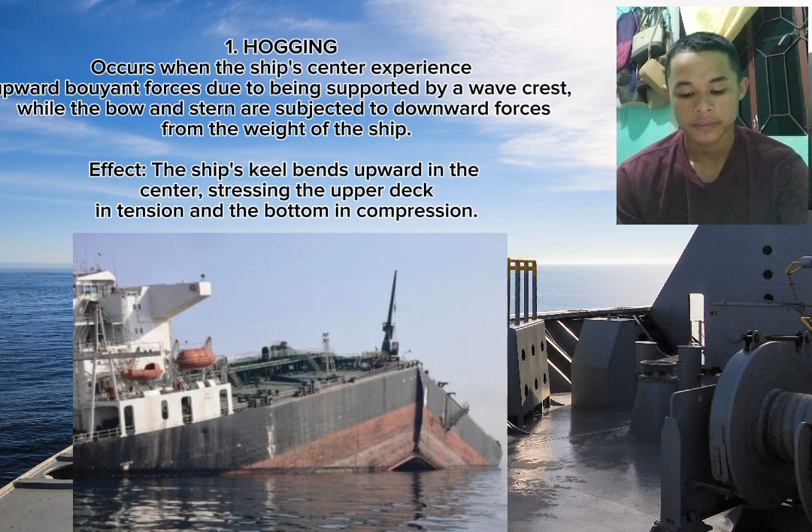Hogging. Hogging occurs when the ship's center experiences upward buoyant force due to being supported by a wave crest, while the bow and stern are subjected to downward force from the weight of the ship. Effect: the ship's keel bends upward in the center, stressing the upper deck in tension and the bottom in compression.

Hogging is a type of longitudinal stress that occurs in a ship. The middle section of the hull is lifted higher than the bow and stern. This happens when the ship is supported by a wave at the center while the ends are in troughs, or when the midsection carries a heavier load than the extremities.

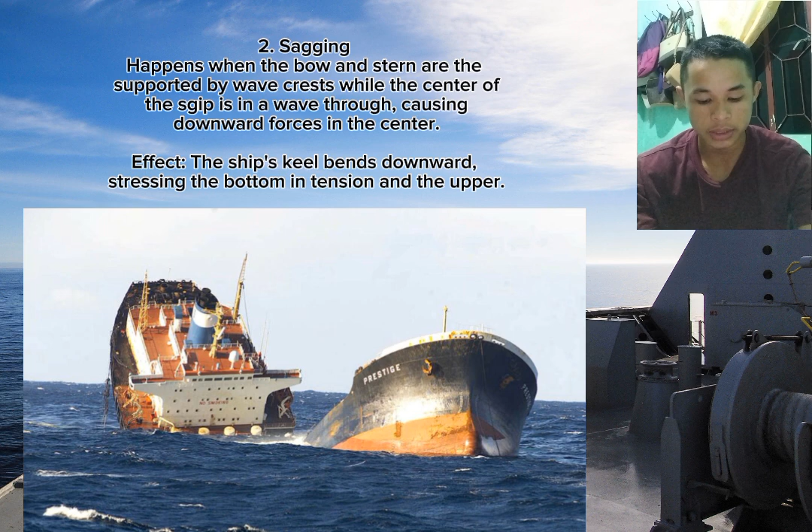Sagging. Sagging happens when the bow and stern are supported by the wave crests while the center of the ship is in a wave trough, causing downward forces in the center. Effect: the ship's keel bends downward, stressing the bottom in tension and the upper deck in compression.

Sagging is a type of longitudinal stress in ships that occurs when the bow and stern are lifted while the midsection is lower. This typically happens when the ship is supported by the waves at the ends while the middle section is in a trough, or when cargo is heavily loaded in the center.

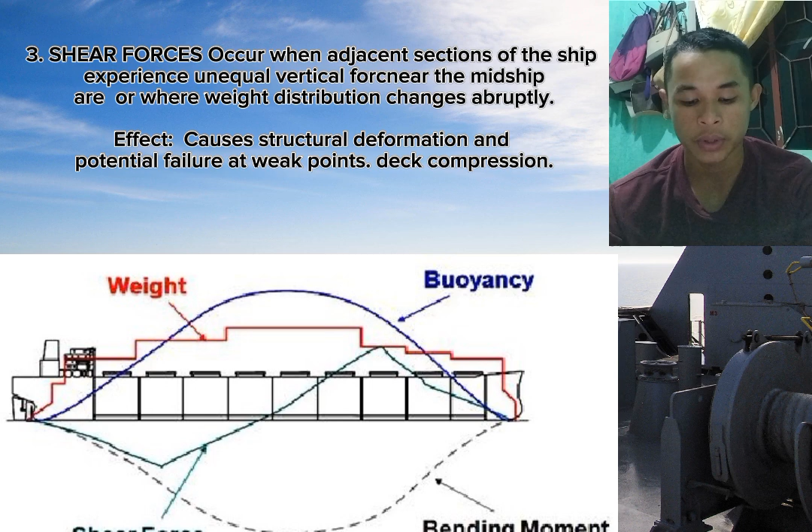Shear force. Shear force occurs when adjacent sections of the ship experience unequal vertical forces, especially near the midship area, or where weight distribution changes abruptly. Effect: causes structural deformation and potential failure at weak points.

Shear forces in a ship refer to the internal forces that act along the hull due to the difference in loading and wave-induced pressure. These forces cause one section of the ship to move vertically relative to another, leading to potential structural stress.

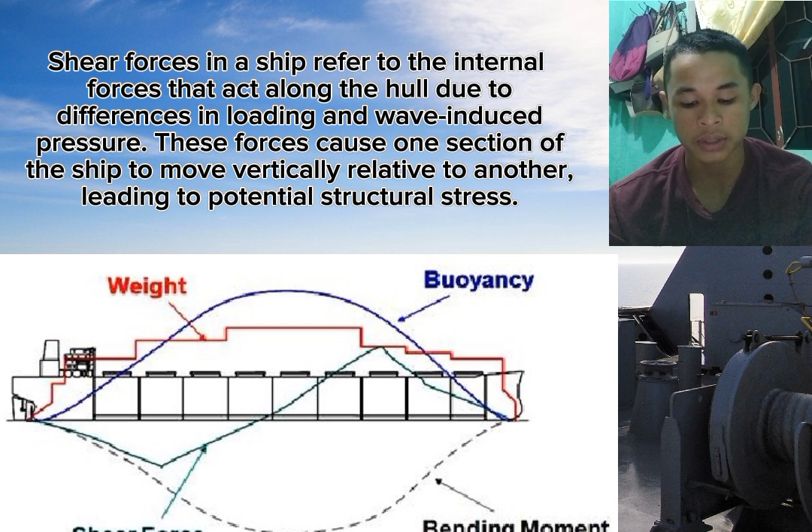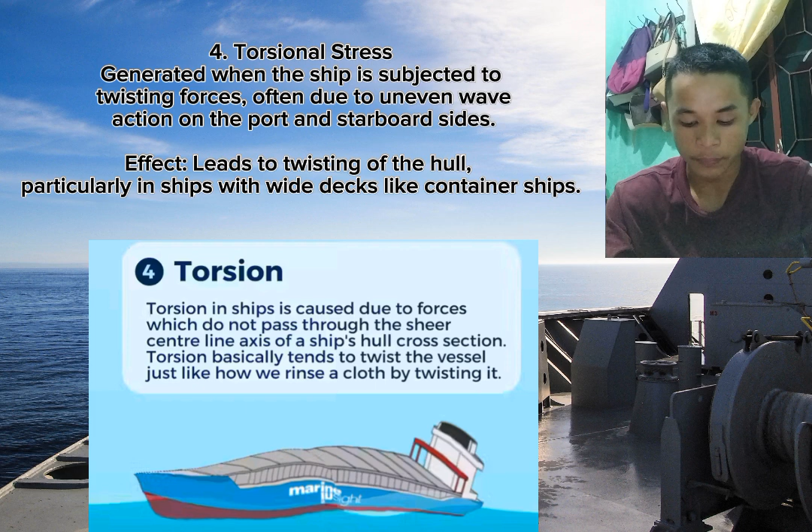Torsional stress is generated when the ship is subjected to twisting forces, often due to uneven wave action on the port and starboard sides. Effect: leads to twisting of the hull, particularly in ships with wide decks like container ships.

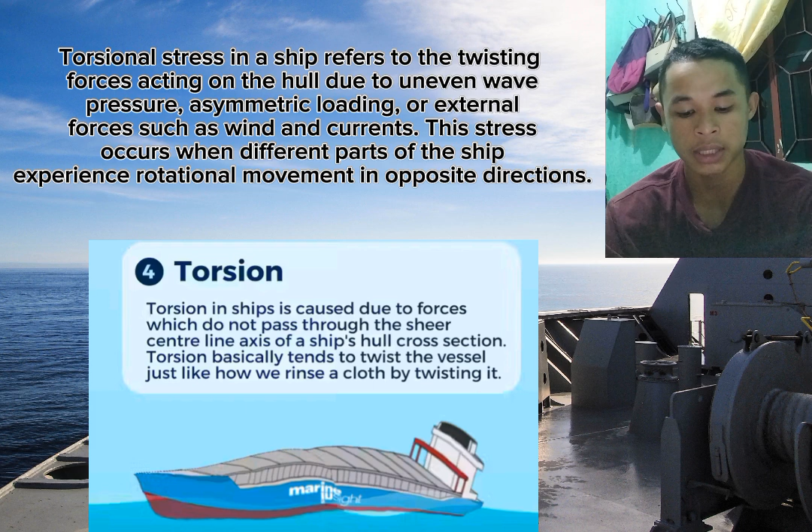Torsion stress in a ship refers to the twisting forces acting on the hull due to uneven wave pressure, asymmetric loading, or external forces such as wind and currents. This stress occurs when different parts of the ship experience rotational movement in opposite directions.

Panting. Alternating inward and outward movement of the hull plates near the bow or stern due to changes in water pressure as the ship pitches or encounters waves. Effect: can lead to fatigue and weakening of the hull plating.

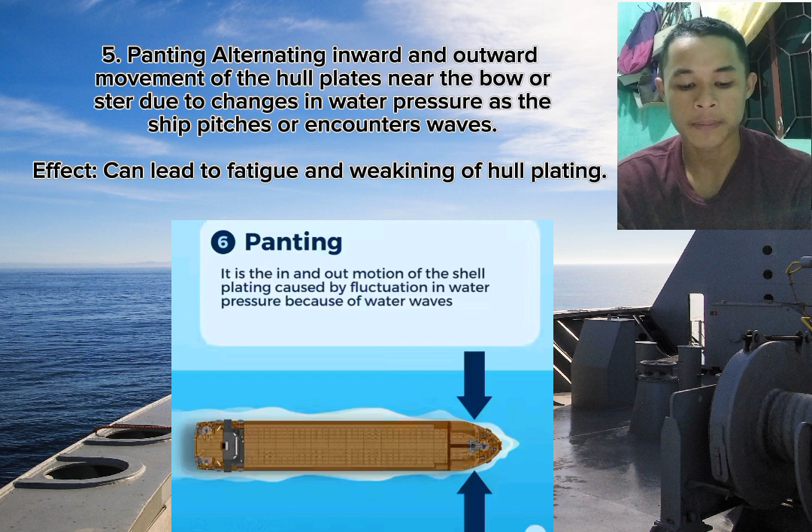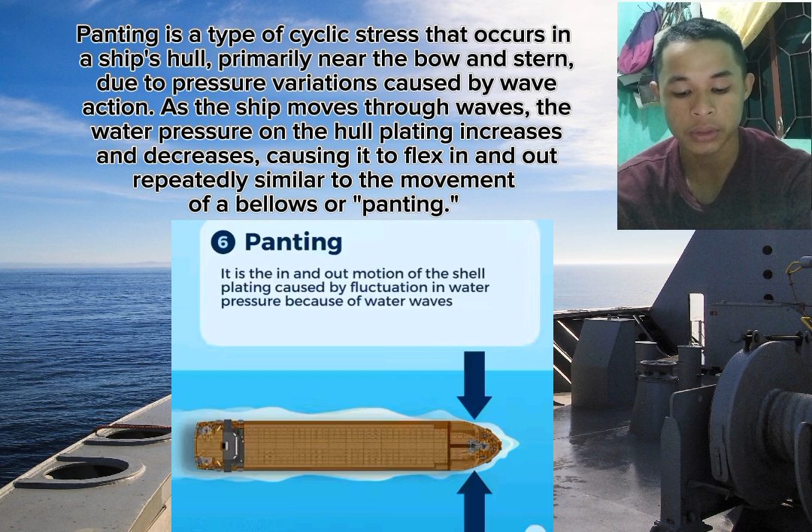Panting is a type of cyclic stress that occurs in a ship's hull, primarily near the bow and stern, due to pressure variation caused by wave action. As the ship moves through waves, the water pressure on the hull plating increases and decreases, causing it to flex in and out repeatedly, similar to the movement of bellows, or panting.

Pounding. The repetitive and forceful impact of the bow or flat bottom sections of the hull against waves when the ship moves at high speed or in rough seas. Effect: causes localized damage to the bow or keel area.

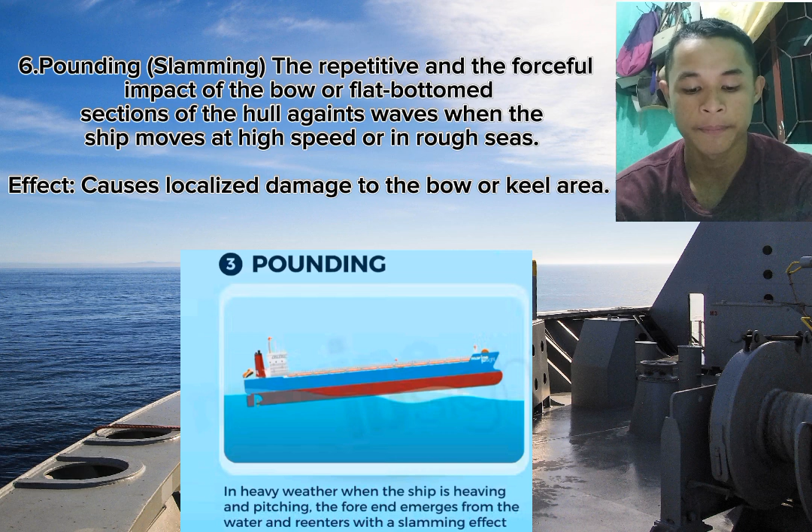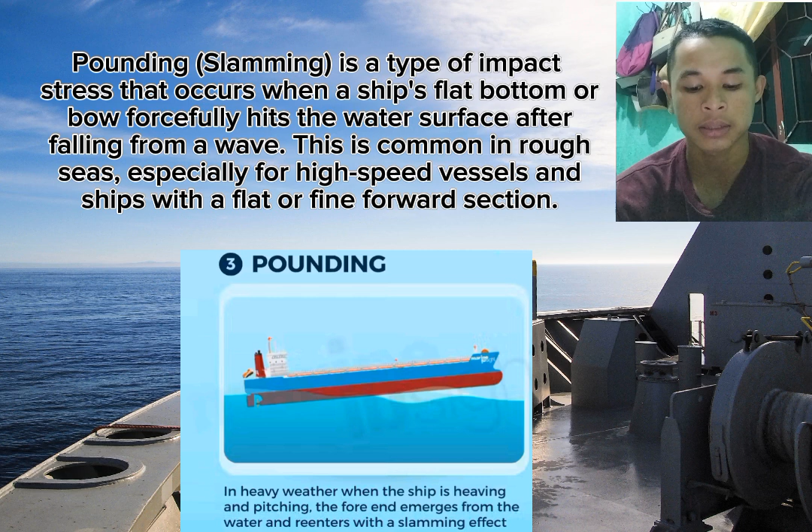Pounding, or slamming, is a type of impact stress that occurs when a ship's flat bottom or bow forcefully hits the water surface after falling from a wave. This is common in rough seas, especially for high-speed vessels and ships with a flat or fine forward section.

Racking. Side-to-side distortion of the ship's structure caused by rolling in heavy seas. Effect: stresses the ship's transverse frames and bulkheads.

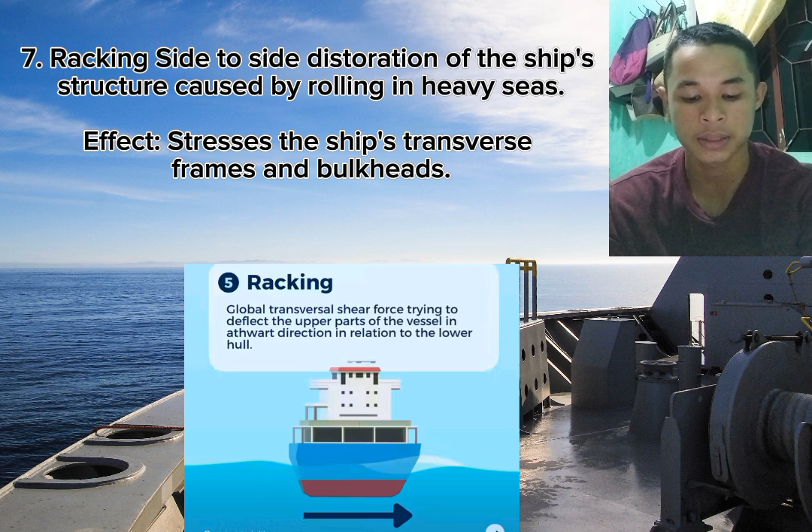Racking is a type of transverse side-to-side stress that occurs when a ship experiences rolling motion due to waves, wind, or cargo shifts. This stress causes the ship's structural framework to deform, with one side moving upward while the other moves downward, leading to a twisting effect on the hull.